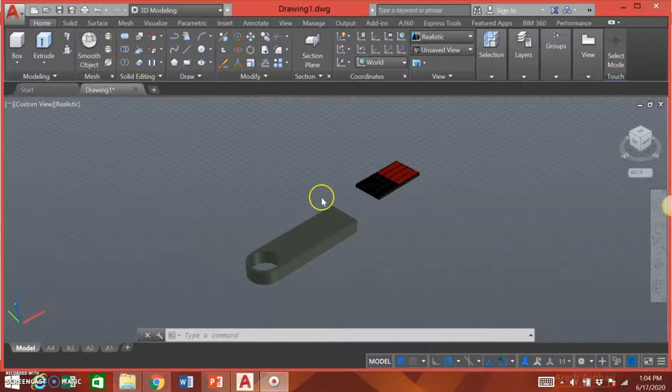Okay, now we have drawn two parts of the pen drive, so we are going to draw the last part, which is this part, which is a spacer. It's a very simple shape that we can draw. Just follow the dimensions here, 10 by 10.5, and then we have a curve here.

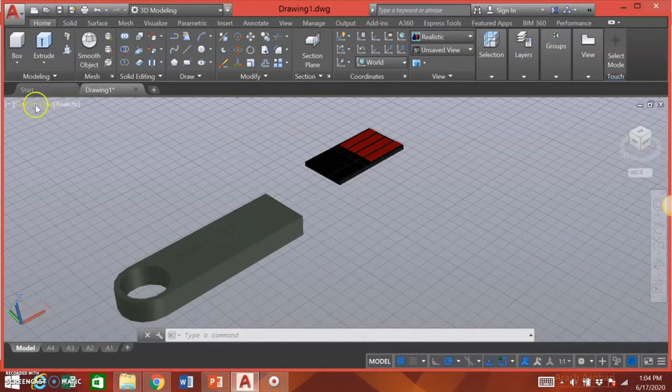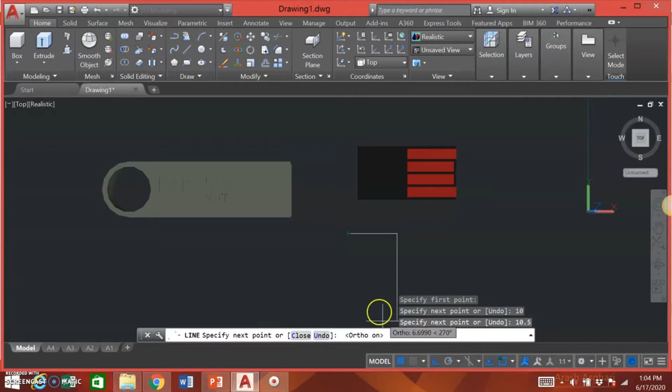So go to AutoCAD, and for me I prefer to draw on a 2D view first. Select line, go by 10, go down by 10.5, and then 10.5. Okay, then we are going to draw the curve.

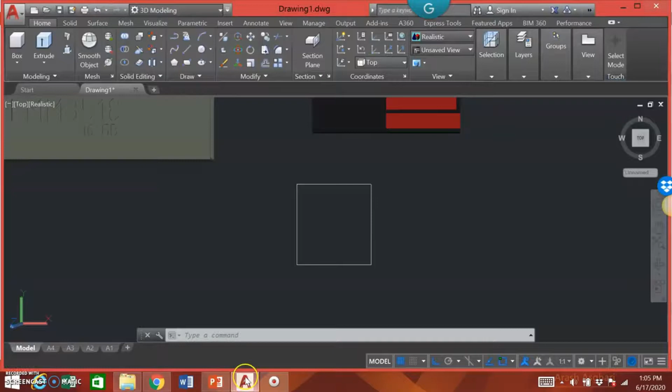If the center point is here, the distance between this is 3.5, so this is 5, so the distance from here to here is 1.5. So draw just one line here, 1.5, as a guide, and then we can draw a circle with the radius of 3.5.

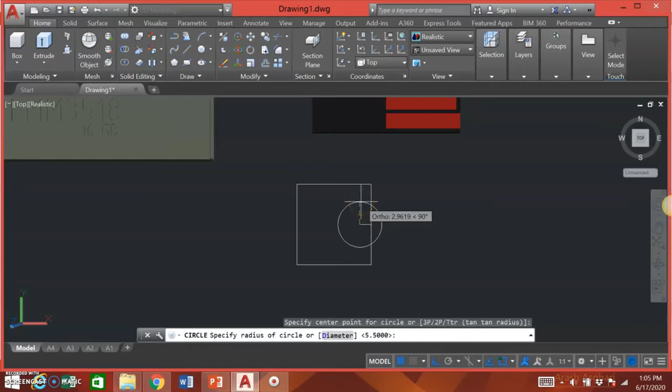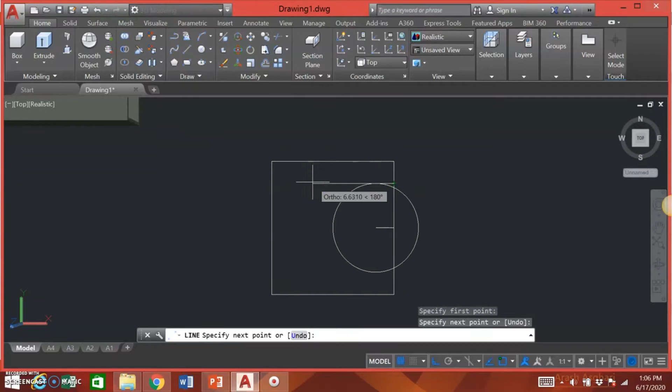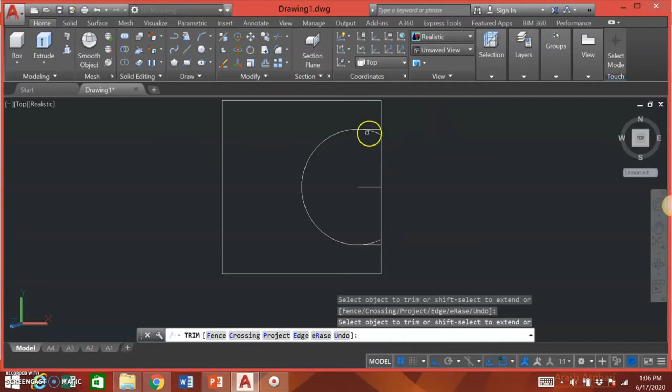Draw another line here. One more line. Okay, so now we are going to do some trimming. This one, this one, this one, and lastly we delete this one.

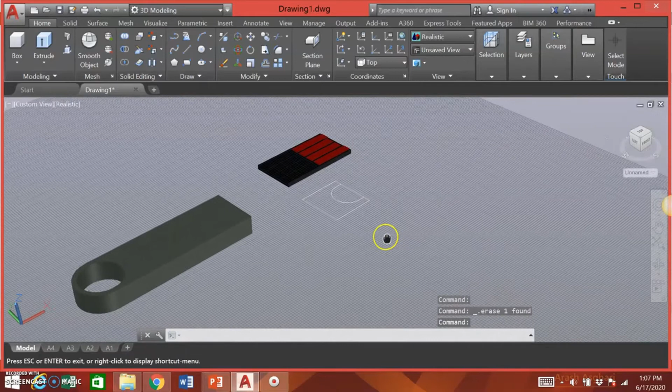Okay, now we already drew the 2D shape. We go to isometric view, and we are going to extrude it, but before that we need to join this part, 1, 2, 3 and 4. Join it.

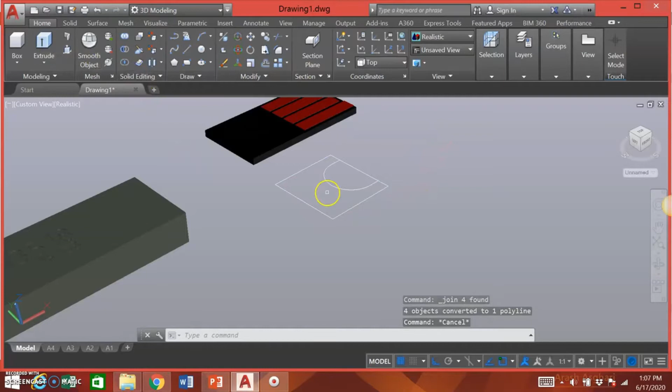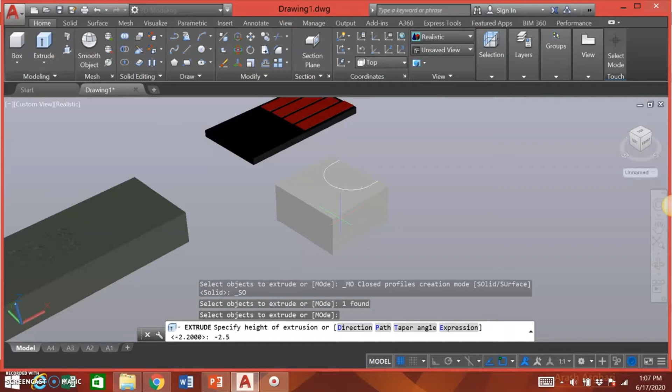After joining it, we can now extrude it. Select extrude, select the object, enter, and the depth is 2.5. Again, because we are going down, it's negative 2.5, considering that the z axis is on top. So it's going to be like this.

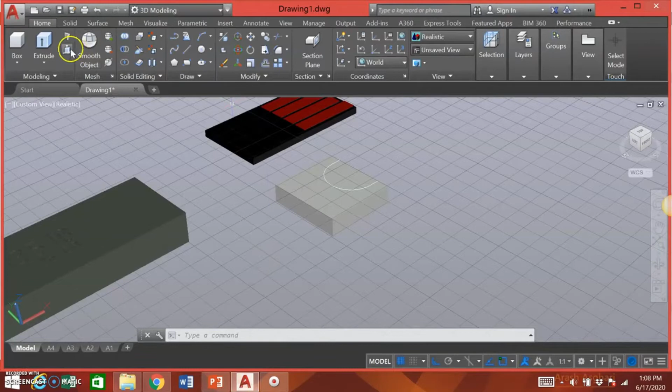And then we are going to press pull this part for 2.5 minus 0.3, so 2.2. Go down, minus 2.2. Okay.

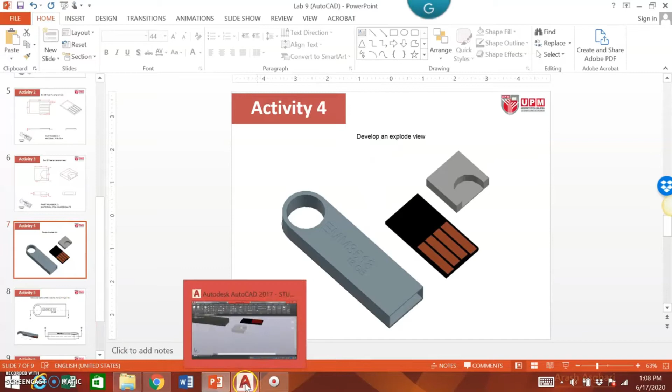We have, yeah, that's about it. You can change the color if you want, but for me the color is almost similar, so I just want to give you some idea about the different colors. So now we already have all the parts for the pen drive.

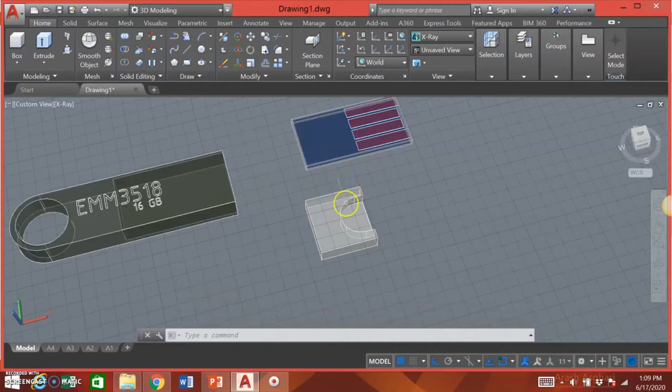Let me show the X-ray view. So for the X-ray view, you can see here for the casing, we have a hole that we're going to put the spacer as well as the chip inside, and then we are going to do some cross section of the object. So this is how we draw the 3D model of the pen drive.

So for activity number 4, develop an exploded view. As I already mentioned during the lecture, for the assembly view, we have the total assembly where all the parts have been assembled together, and at the same time we also have an exploded view where all the parts are arranged near each other to show the arrangement of all the parts.

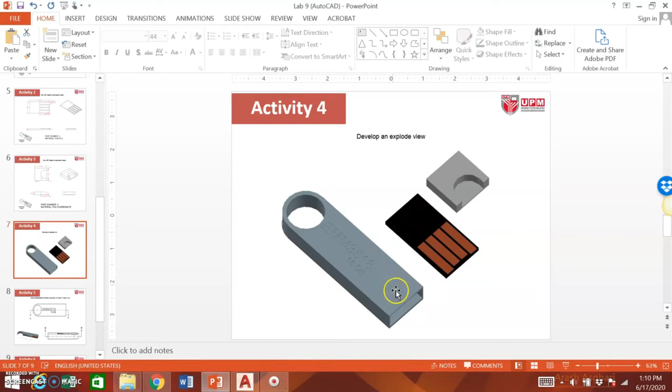So like this one, I think it's better for us to arrange it in this direction. For the assembly view, what I'm going to do is move this object so that it's on the same line. So select this object, enter, and have this, and then something like this.

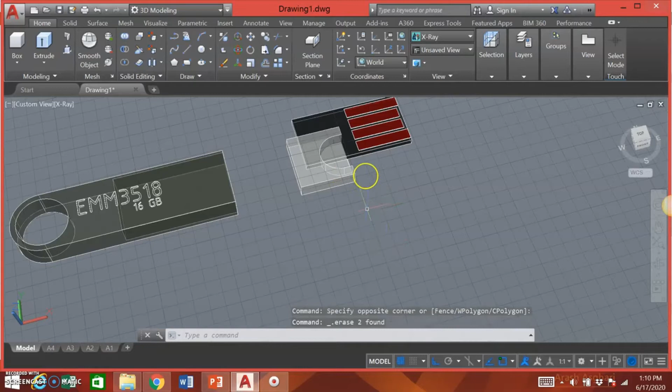Okay, you can see here some lines that we can delete. This one also, and for this one we can also move it into a position that is parallel with the one we want. Let's just put it here.

Okay, so sometimes it's a bit hard for us to move it because of the Y and X axis, so that's why you have to play around with the Y and X axis in order to move it according to the position that you want.

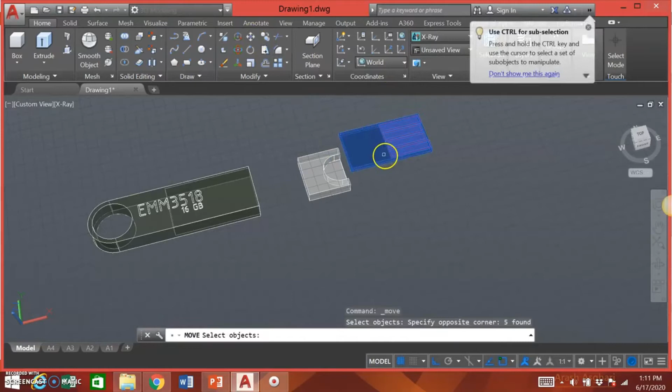Okay, something like this. Maybe this one we are going to move a bit nearer to the casing, something like this. For this one too.

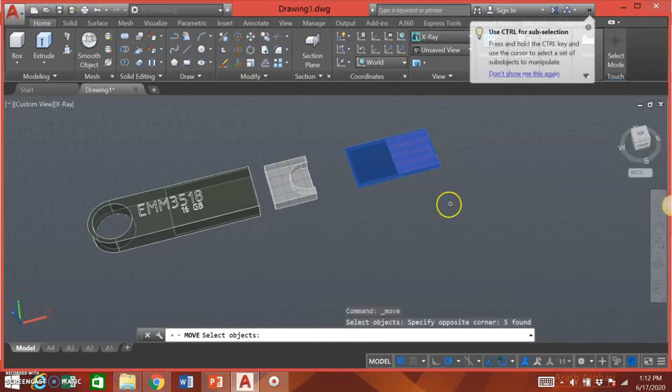Okay, from this side this looks okay, but we have to also see from other angles. Sometimes the arrangement is not proper. It's not proper actually.

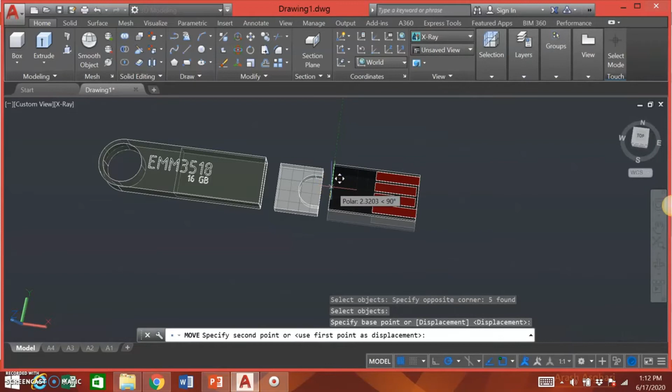That's why what we can do is change this axis according to the axis of the position that we want. Say this one, enter.

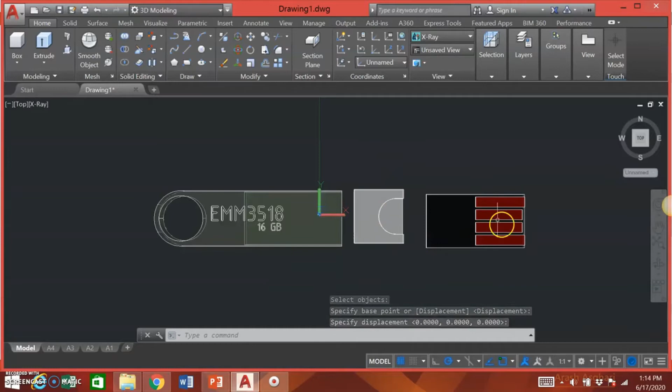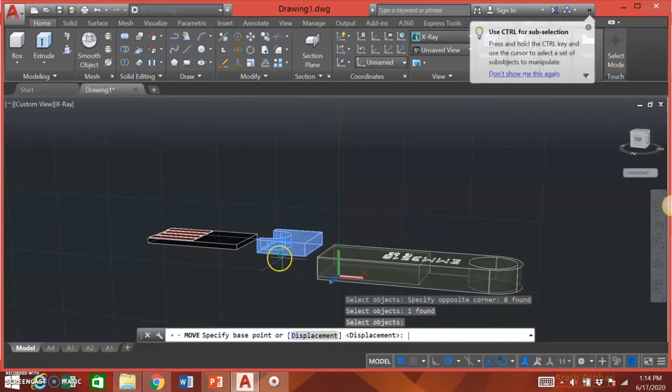Okay, something like this, you can arrange it later. Like this one, you can see that it's a bit above. So again, on this side, and move down the object that you want, something like that. This one too.

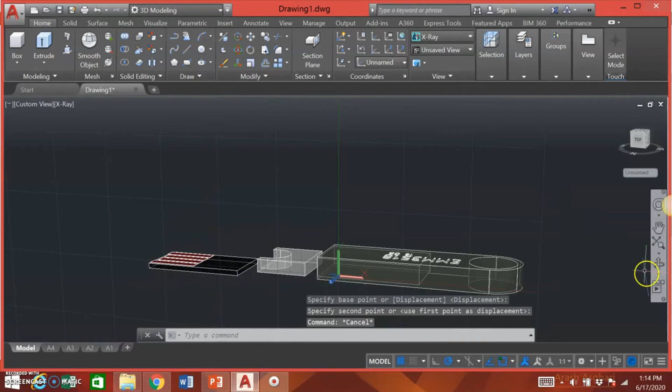So that is going to show the arrangement that it can be assembled. You can do it properly after this, but I want to show you how to assemble the pen drive, and this can be arranged by moving the parts inside of the main parts.

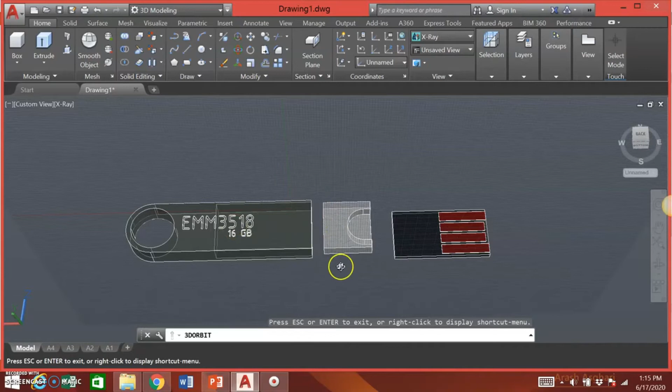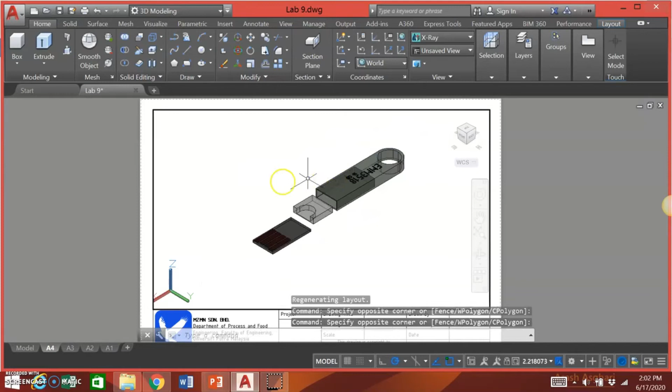Before we proceed with the assembly drawing, I want to show you how the exploded view can be represented in the template. So go to your template, say like this. It's up to you actually to change the rotation and the size of your drawing.

Again, I did not arrange it properly, so I really hope that after this you can spend some time to arrange it properly so that it's going to look nicer. And for this one, I want to show you how the arrangement can be done.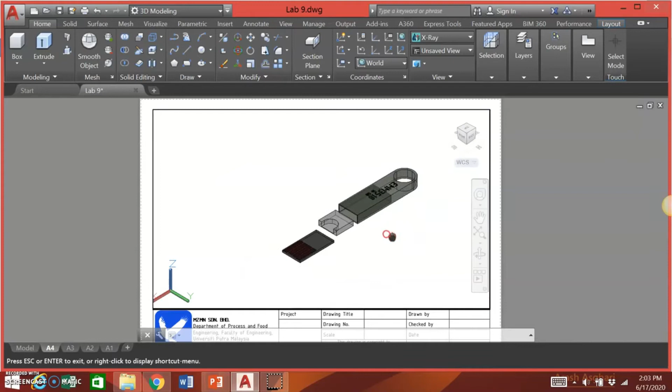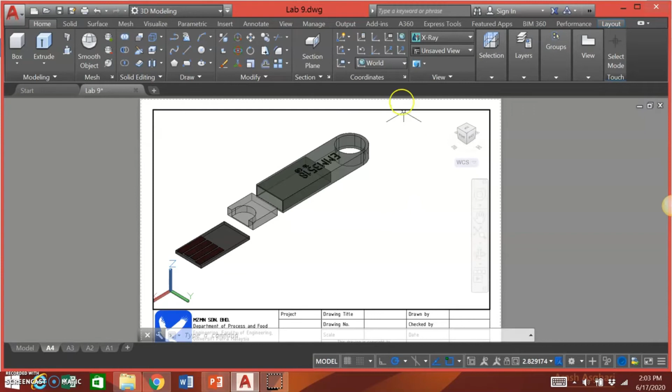What you need to also bear in mind is that you need to put some space in this area so that you can include the bill of material table, which we already did during the 2D assembly drawing. So the same thing can be applied for the 3D assembly drawing, where we can have the bill of material table here.

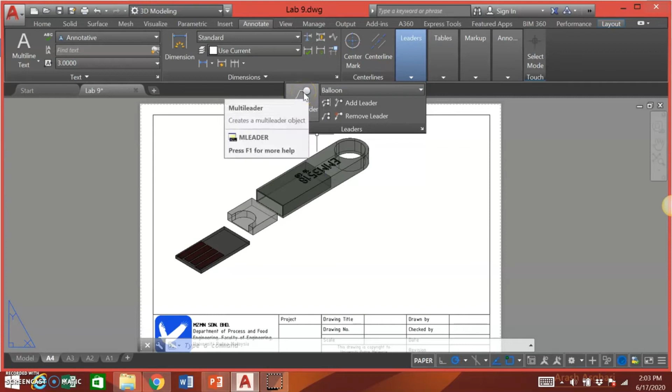And then for the parts we can include balloons in order to differentiate the parts and identify them one by one. So to include the balloon, we can change this model to paper view, then go to annotate, go to leader, and change this to balloon. Then we have the multi-leader, click multi-leader, and you can have the first one. Let's say this is part number 1. Let's go to part number 1, and then this is actually part number 3.

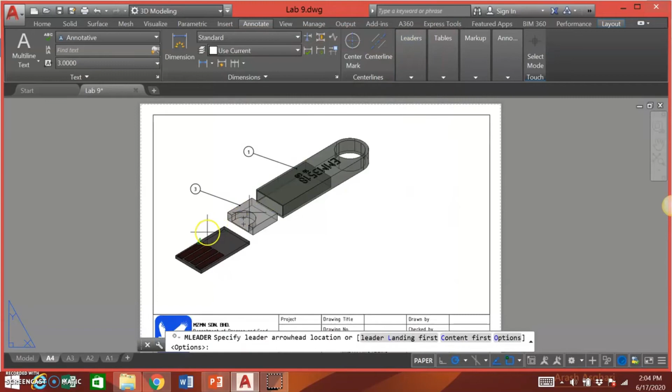And then let's say this is part number 2. Again, in terms of the arrangement of the balloon and everything, we already covered during the 2D assembly drawing, so I really hope that you can apply it again for this 3D drawing.

So after this, after you have all the balloons here, you can include the bill of material. For this one, the bill of material is consisted of few things, such as the basic one: the item, the quantity, name, and material.

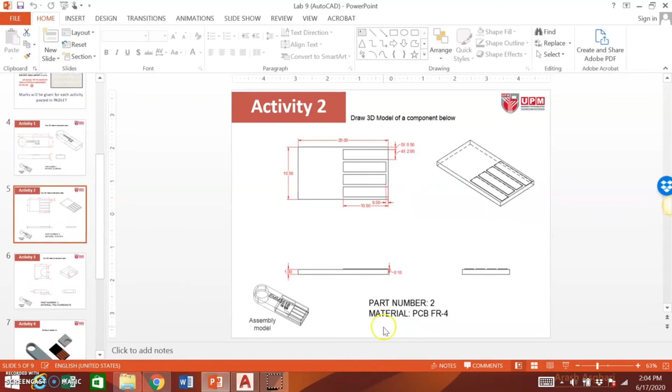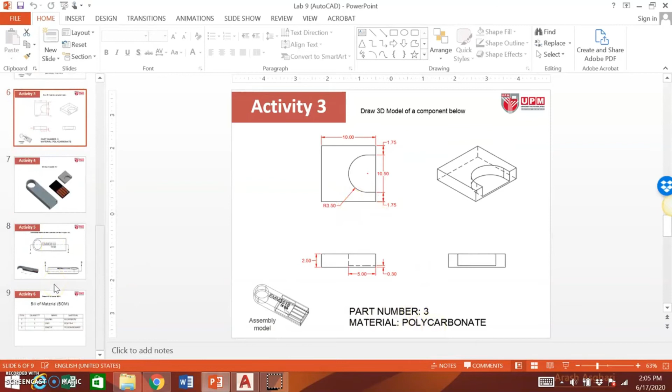Let's say part number 1 is the casing and the material is aluminium. Part number 2 is the chip and the material is PCB FR4, and part number 3 is the spacer and the material is polycarbonate. So we can prepare the table by giving all the details here, something like this.

Where this BOM can be included at this side along with the balloon here. Okay, so that's about it.

And now I want to show you how to assemble this drawing so that it's going to be one model that consists of a few parts. So it's really easy actually.

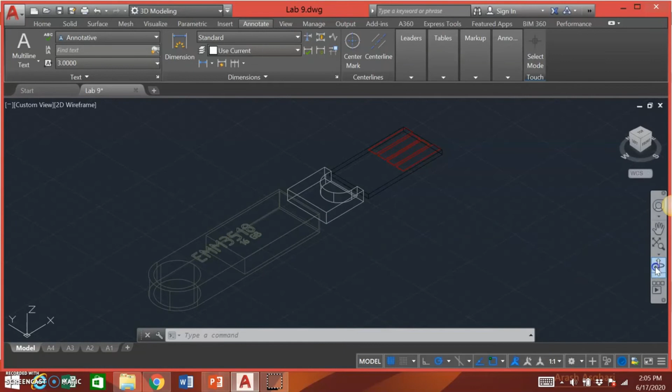What you can do is just move all these parts together, and we need to pick which one is the main part, and in this case, part number 1 is the main part. So what I'm going to do is move, let's say, part number 2 first.

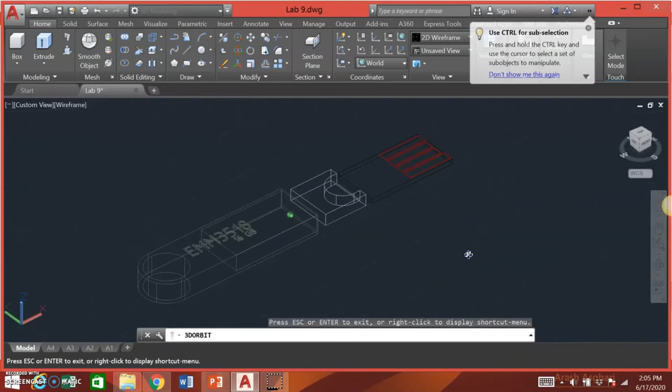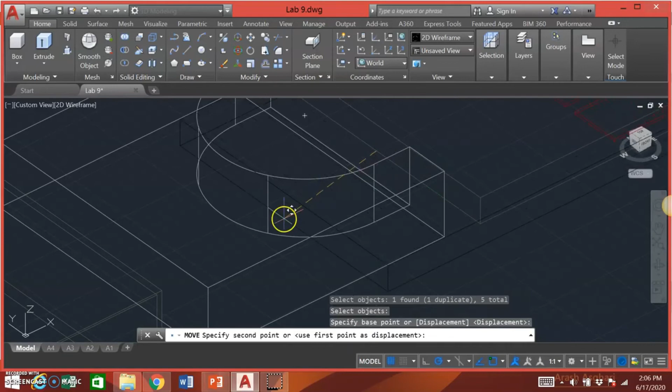What we can do is pick the midpoint of the bottom, and then we're going to move it so that it matches the midpoint of this space here. Enter.

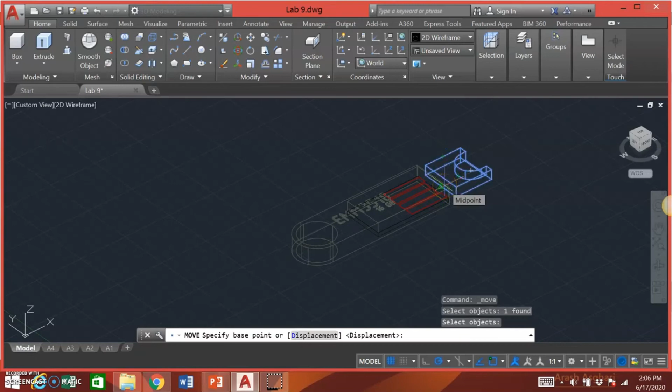So the next thing is to move this part number 3. Same thing: move, choose part number 3, and then we can choose the midpoint of the bottom here. Then we move it so that we can match the midpoint of part number 2.

So that at the end it's going to look like this. This is the assembly drawing of the pen drive that we have drawn.

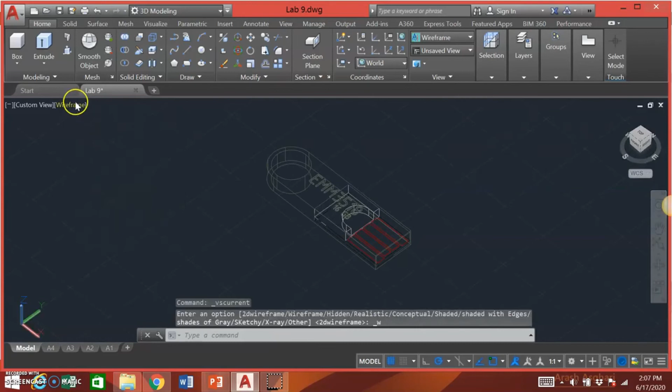You can change this from 2D wireframe to, let's say, wireframe, to the conceptual, to the hidden, and let's say X-ray. Okay, something like this.

Now I want to show you how to do the cross section, and this is for activity number 5. We want to cross section this into half so that we can see what's inside the pen drive.

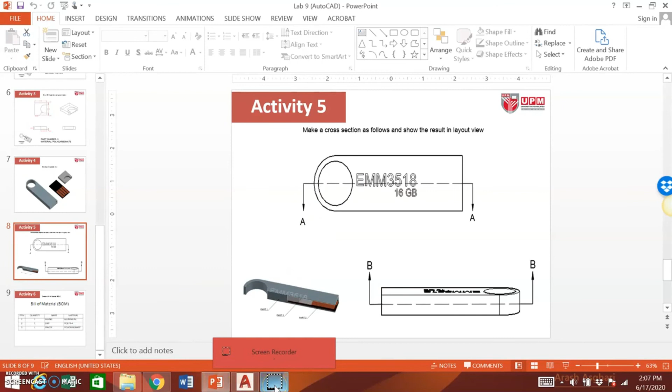And in the previous lab I showed you how to do it in the layout, where the 3D model can be converted into a 2D view, and we can cross section that view so that we have the cross sectional view as what we want.

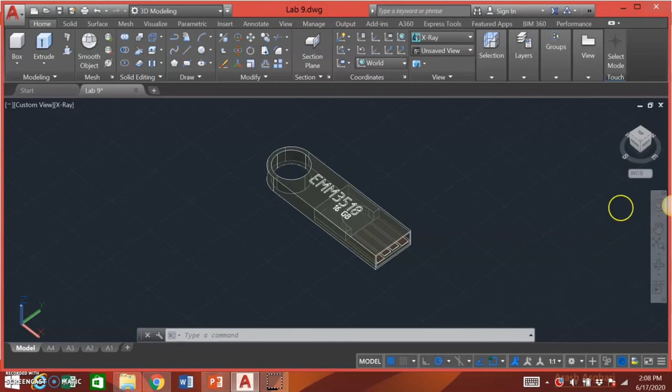And this time I want to show you how to do it by using another function, by using section plane. We can change this section plane in order to cut the plane through a 3D object so that we can see the cross section of it.

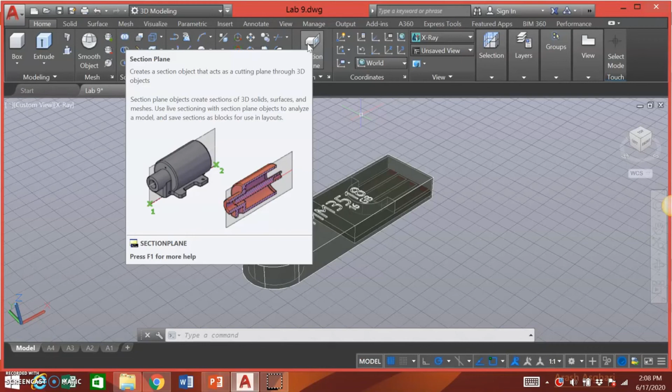So click section plane, and it's going to give you a few options here. If you don't choose any of these, it's just going to follow the face that you want to have. Let us start with the face first.

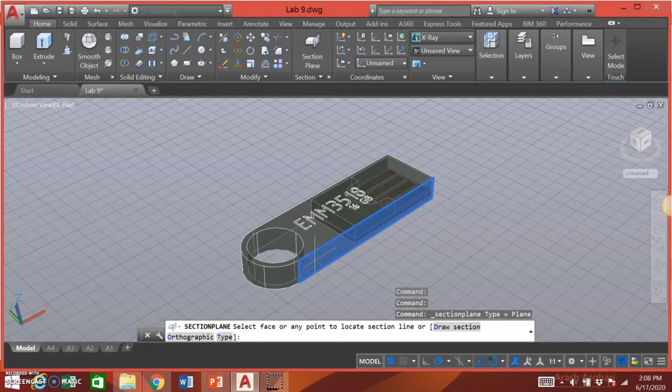Let's say we choose this. Okay, so this is the plane it's going to cut. It's not exactly at the middle, so what you need to do is to choose this.

And you can see an axis here, and then you can just move this according to where you want to locate the plane. Let's say you want to put it in the middle.

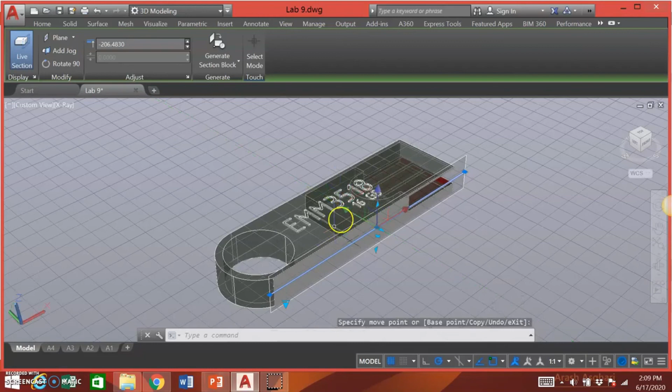Something like this. Okay, this is another way, and another way of doing that is, besides having the face, choose section plane, and then you can choose this draw section, where we can draw the section by

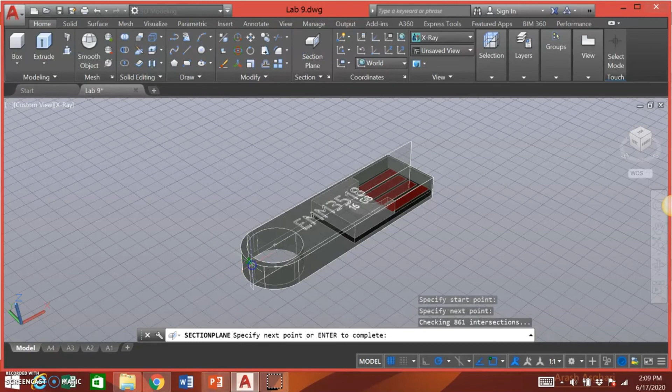selecting the midpoint here up to the midpoint here, and then enter.

You can choose this midpoint and go to the midpoint here. Okay.

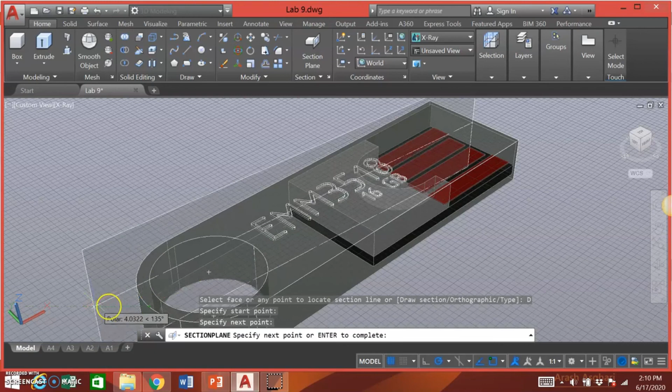Enter, and then it's up to you to choose whether you want to see this side or this side. If you decide to choose this side as the one that remains, you click here.

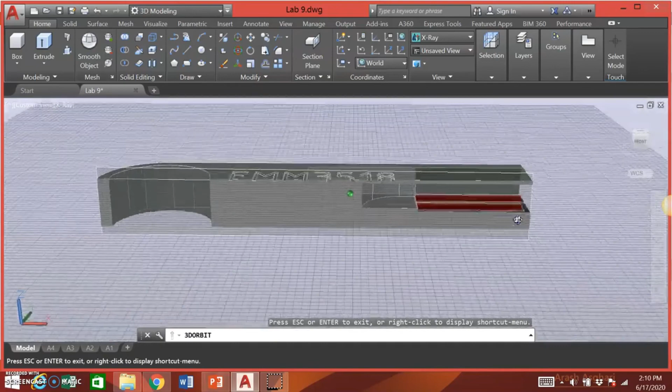Okay, now it's already cut into half, so you can see the cross-sectional view of the pen drive that you have drawn. Okay, so more or less it's similar to the one that I showed you before, but this one we did by using the section plane.

And I believe that you can also search on the internet, on YouTube. There are so many videos to show you how to do the section plane and so on, and how to draw more complicated and more complex 3D drawings.

And the one that I show you for this class is just a basic one, so that you can get some understanding about the way we draw assembly drawings and exploded views of the 3D model.